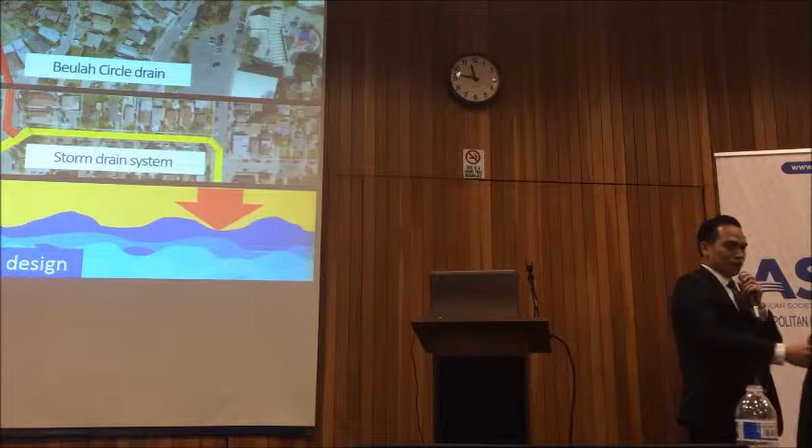To alleviate the condition, infiltration trenches were installed, but it did not work. The traditional solution is to construct a new drainage system consisting of 18 inch reinforced concrete pipe that collects the water and brings it 2,000 feet down to the storm drain and outlets into the ocean. It was estimated to cost about $1 million and take 6 months to complete.

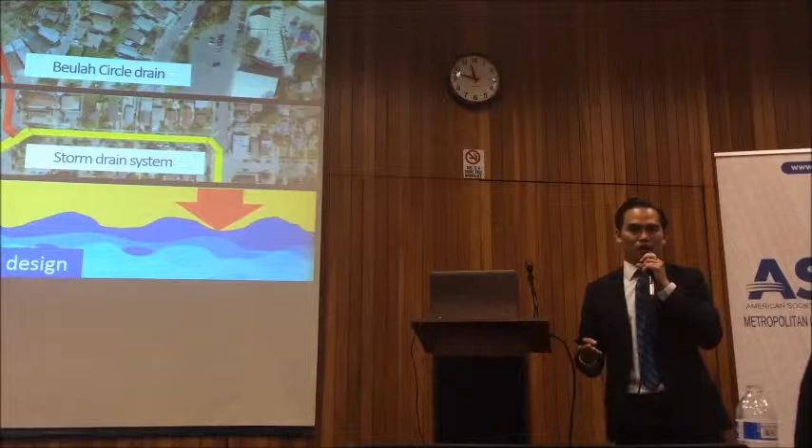However, this solution presented a challenge for many reasons. The primary issue raised by residents was how construction would impact community traffic. As you can see in these photos, when cars park on both sides of the street, one car can barely drive through. It's also close to a park and school, making it impossible to close down for 6 months.

So we looked to different alternatives and saw the opportunity to introduce sustainable solutions: dry wells on Villa Soco Street, where only a few homes would be affected by traffic rather than the whole community. It was estimated to cost only $150,000 and take 2 months to complete, so the community was completely on board with the proposal.

So we went ahead with the design and construction. To drill a 5 foot wide by 7 foot deep hole takes only 1 day. The construction of the well is very straightforward—the dry well is built with 5 foot segments of 48-inch diameter perforated concrete pipe, with holes along the wall for infiltration purposes.

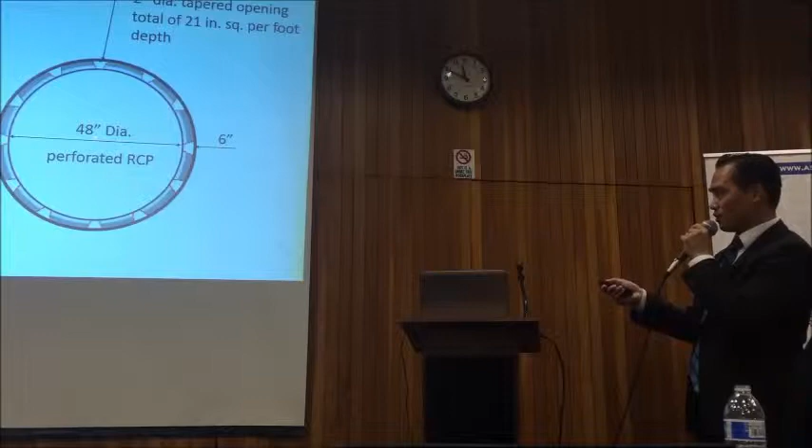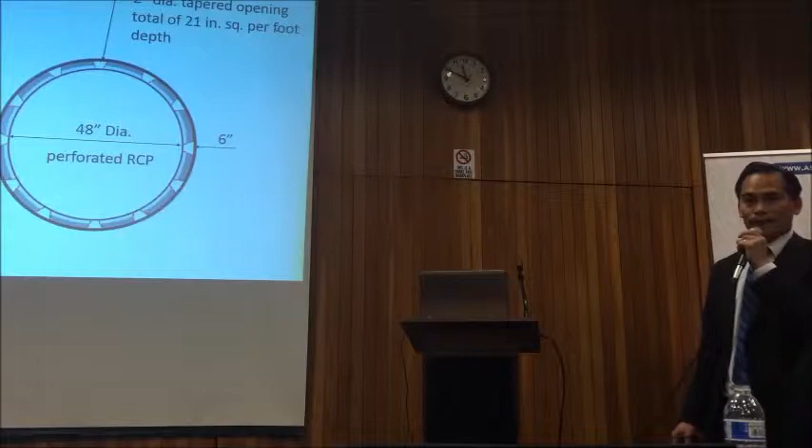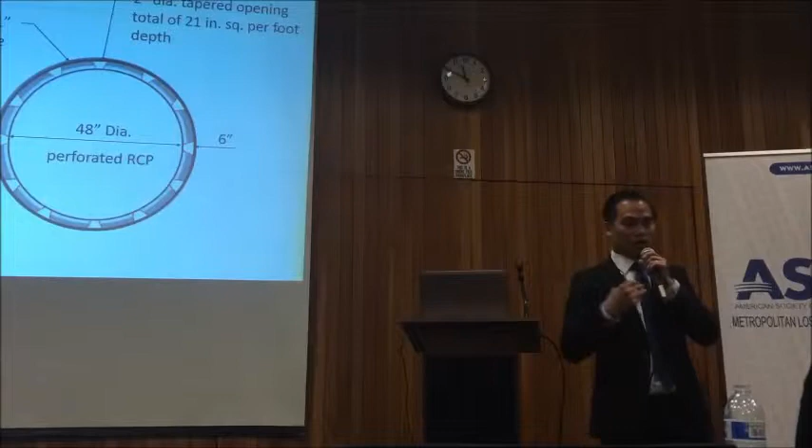There are 12 tapers of 2-inch diameter opening along the wall, a total of 21 square inches per foot depth of opening. Before you lower the cylinder, or the perforated concrete pipe, into the well, chicken wire is required on the outer edge of the pipe.

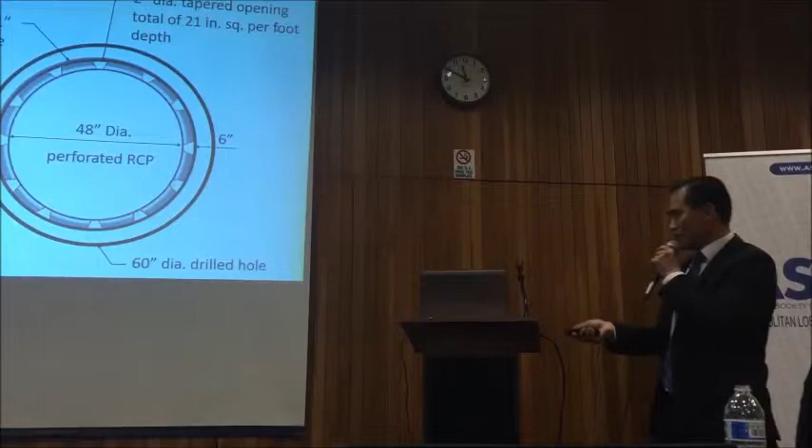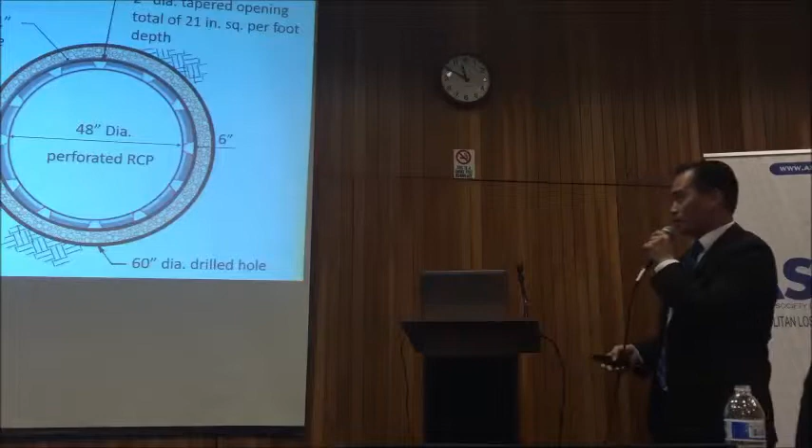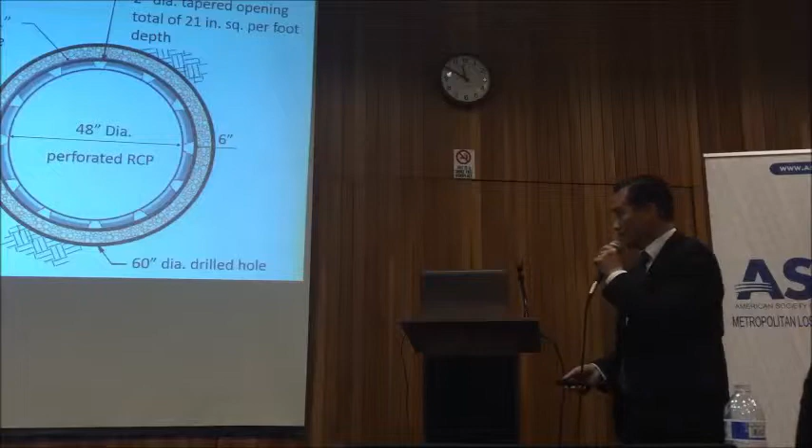Lower segment 1, segment 2, segment 3 into the 60-inch drill hole. Then you fill around the outer edge between the wall and the soil with gravel. This gravel helps the well stabilize and keep it straight during construction. You continue the same steps until you reach the top.

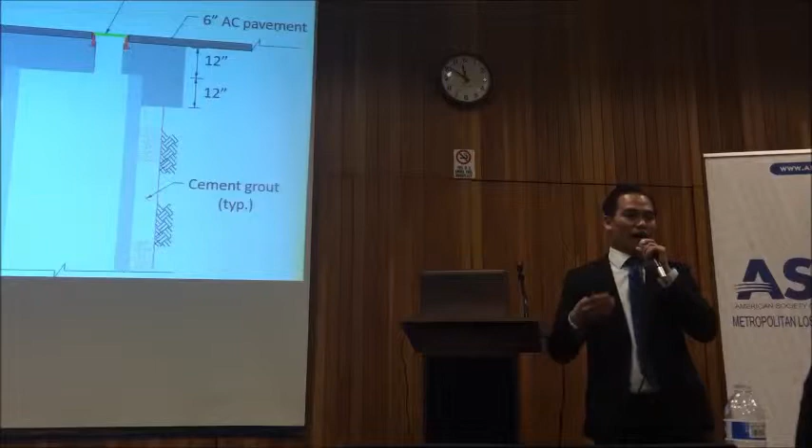So this photo shows the top of the well. On top of the well they have a 12-inch concrete cap, and on top of the cap there's 6-inch AC asphalt concrete. The well is then closed with a manhole cover. This manhole cover has a lock and chains that secure it from anyone trying to steal it.

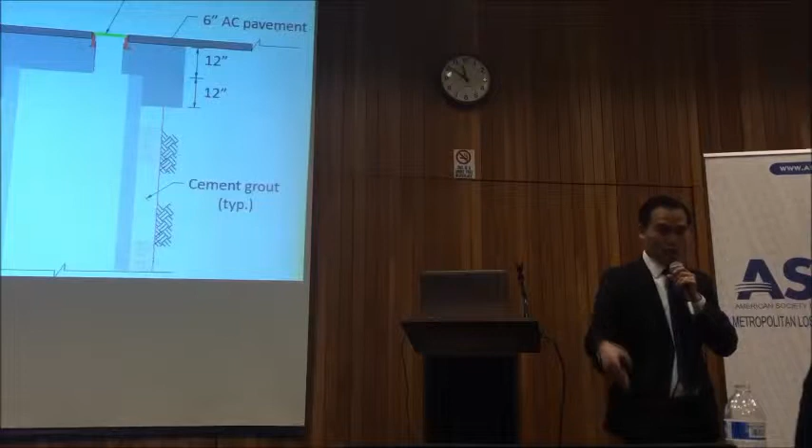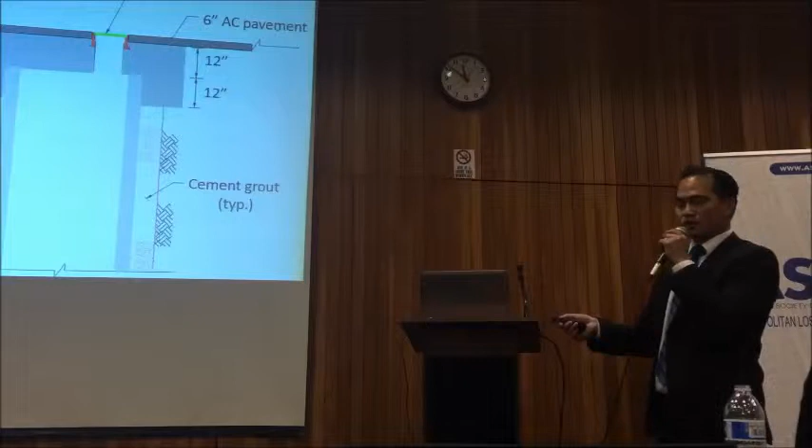Imagine a 70 feet well is open - it's not a good idea. So there is a connected pipe between two wells, as you'll see in the next slide. The first 12 feet from the top of the well consists of solid wall reinforced concrete pipe. The top 12 feet is the solid reinforced concrete pipe, and the remaining 58 feet is perforated concrete for infiltration purposes.

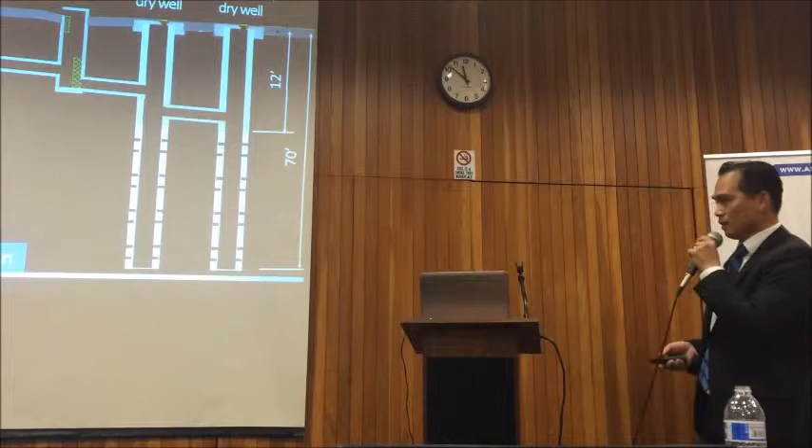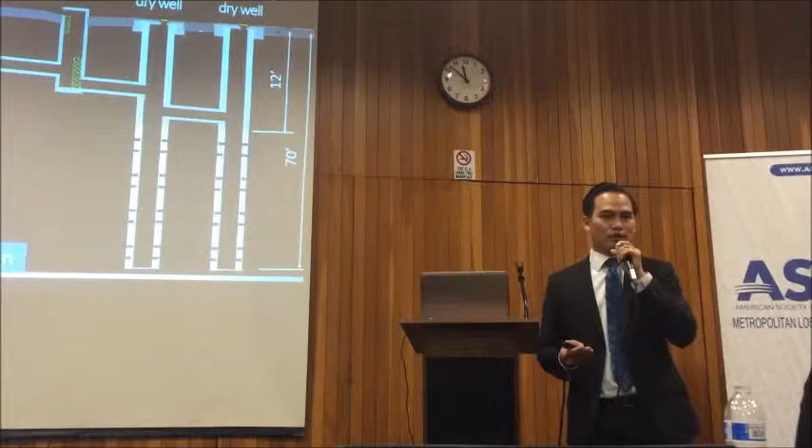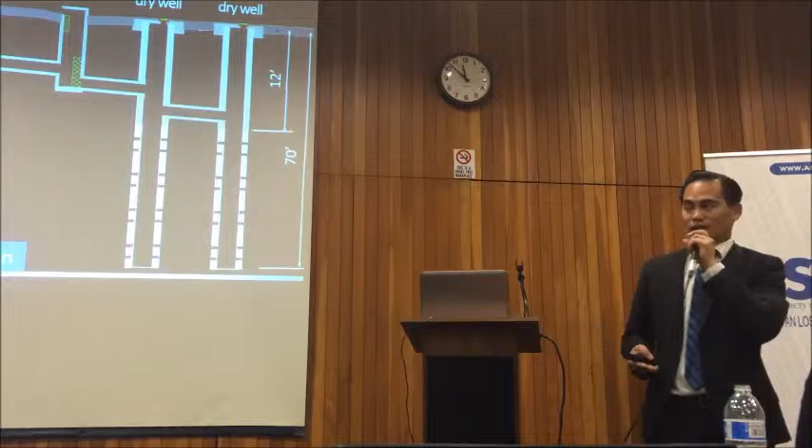So how does the dry well work? To determine the feasibility of a dry well system, we conduct a subsurface investigation and percolation test. The site geology characterizes the site as massive siltstone, which is feasible for the dry well. If it were clay, then it's not going to work.

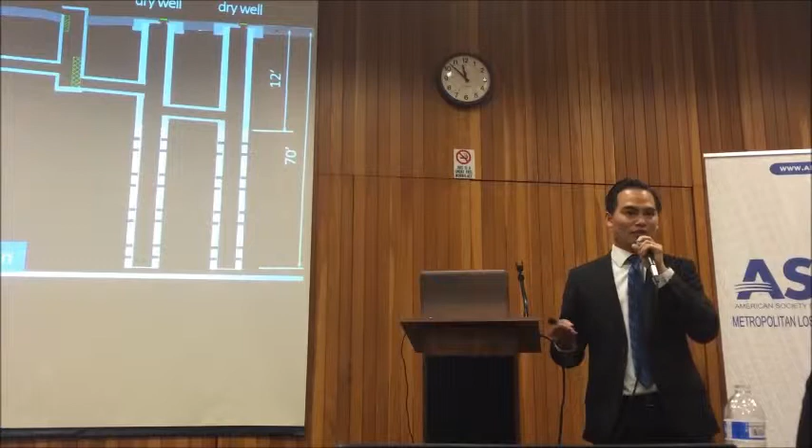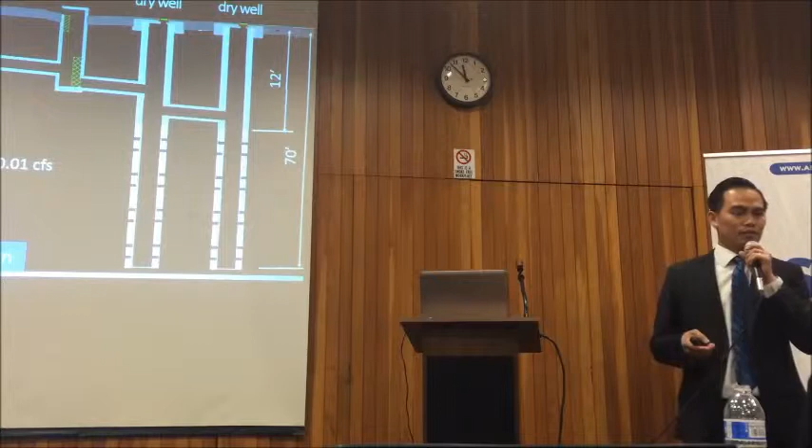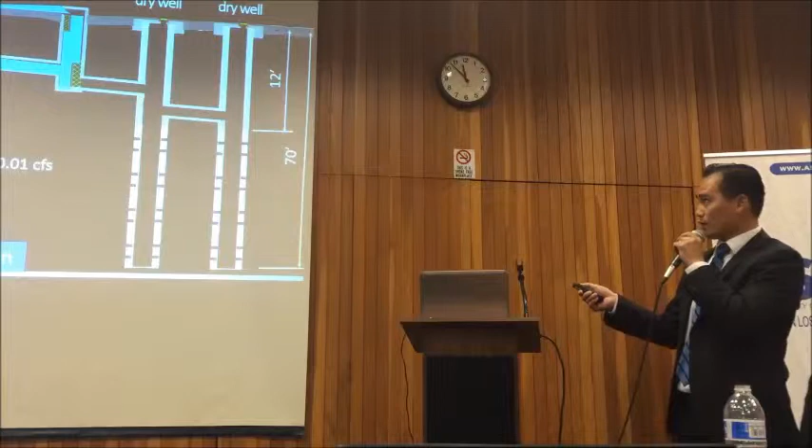The percolation test result indicates 0.01 cubic feet per second, adequate to drain the wells within 24 hours. When water flows on Beautiful Street, it will be captured by a two-sump catch basin. This catch basin has a connector pipe screen that cleans out trash and debris. There are two filters here before the water enters the primary dry wells.

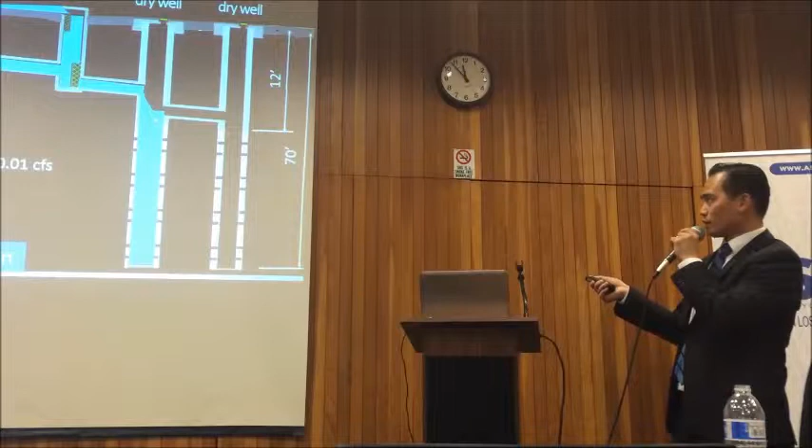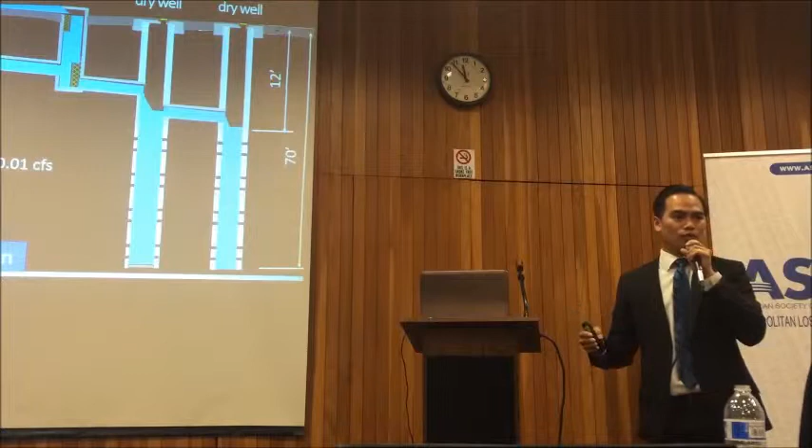The primary dry well is designed for a 10-year storm event, and it has an overflow that allows water from the primary dry well to flow into the secondary dry well. Both the secondary and primary dry wells can handle a 50-year storm event with 2 cubic feet per second.

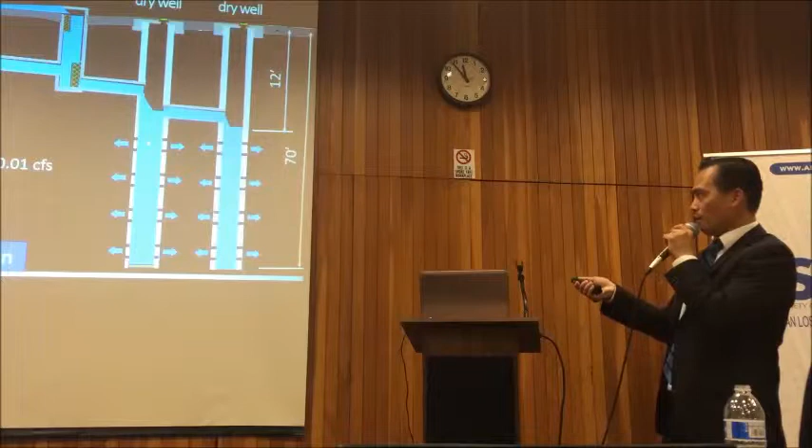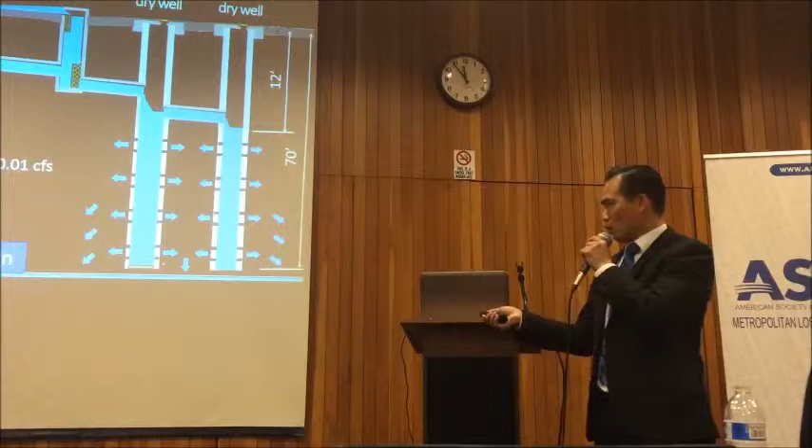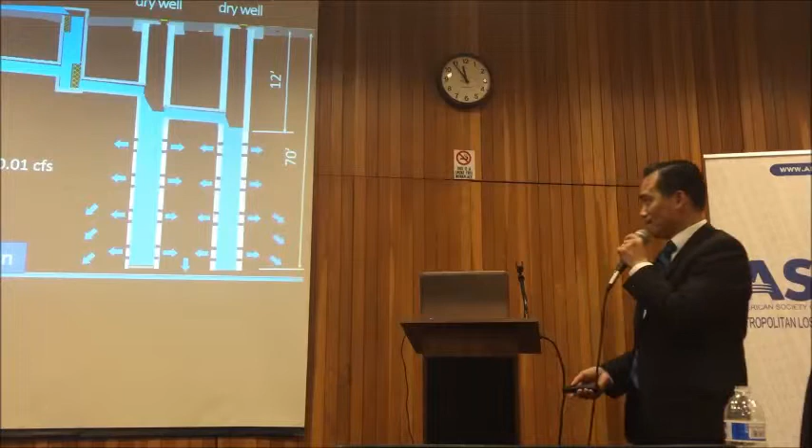Along the wall they have holes that let the water flow out to the gravel and to the soil, to further filter the water before it's infiltrated into the ground. Sediments will be collected in the primary dry well, and after 3 years of monitoring, we collected only 1 foot of sediment. So the dry wells have an expected useful life of 25 to 50 years.

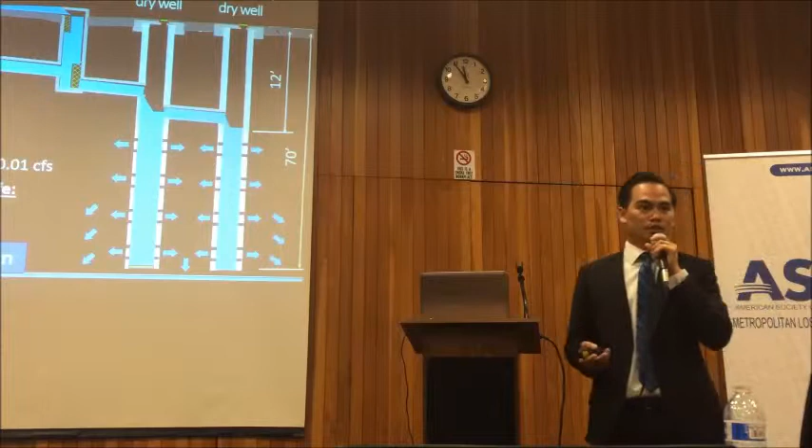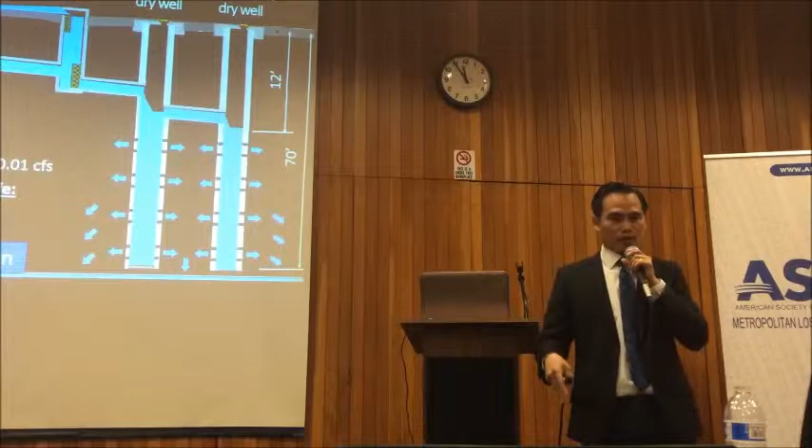And the natural well that you saw earlier, we left in service for emergency overflow purposes. The reason we have a 70 feet deep well is because we account for the accumulation of sediments.